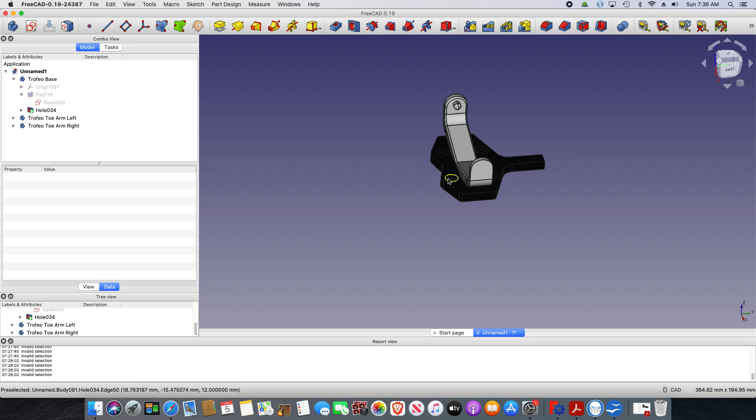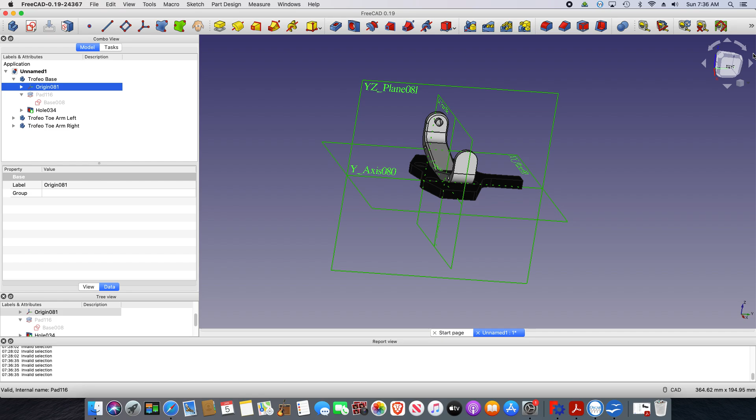To demonstrate FreeCAD, let's say we want to build a 6mm shim for our ATK Trofeo toe. I've already drawn the toe, and I've got it 6mm off the ski, where the axis coordinate system XYZ, we're 6mm off the ski here.

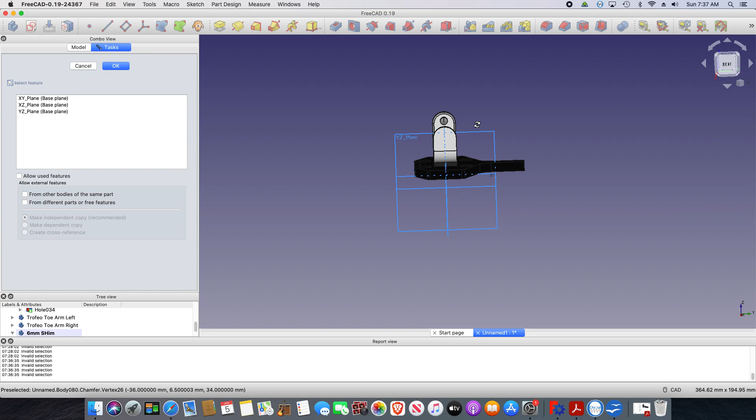So the first thing we're going to do is create a new body over here. We're going to name that body 6mm shim. And then we're going to create a sketch on that body, and we're going to make that sketch on the XY axis, which is X left/right, Y forward/backwards, Z up and down.

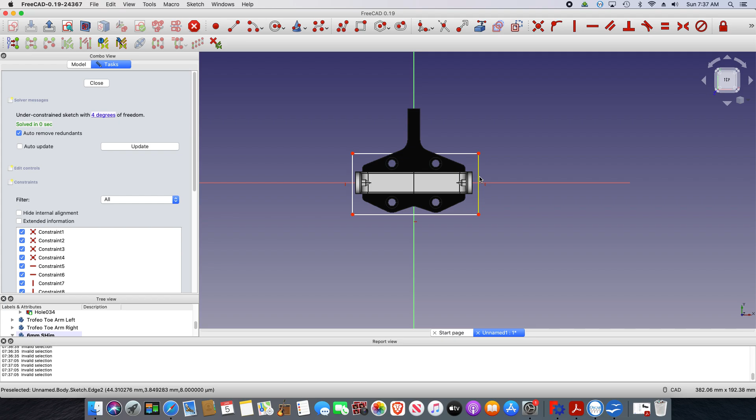So now we have a sketch tool, and we have some options of things we can draw. One of the things we could draw would be a square, so I'm just going to put a square on here. Simple. And then, very important in FreeCAD, is the ability, the necessity, to constrain your sketch.

So the first constraint I'm going to put on here is to make the y-axis dimension symmetrical about the x-axis. So now that's symmetrical. And then the x-axis dimension symmetrical about the y-axis, using the symmetry tool here. So now no matter what I do to the part, it's going to be symmetrical.

So we need some dimensions. Normally I'll just drag things to about where I want them, and then I'll select the two endpoints and use the dimension tool. I usually try and make things round numbers - I work in millimeters. Making things round numbers just makes them easy to remember and keeps things simple.

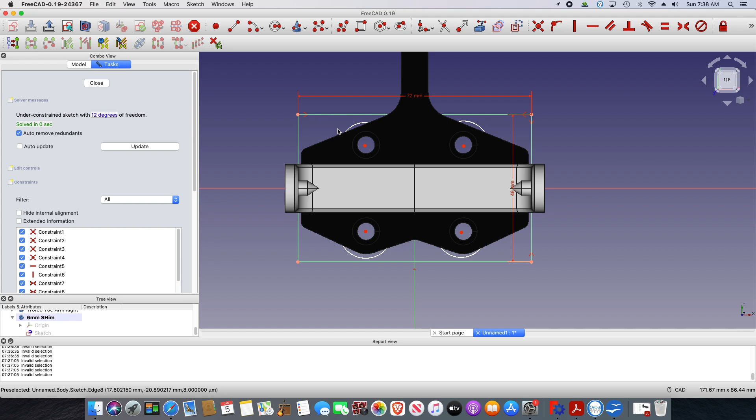We'll just create that. Then the next thing we want to do is have 4 holes in our shim for the fastener bolts to go through. You couldn't see it very well, so I'm going to go ahead and hide the base, and then go back into the sketch so you can see what I'm doing.

So we have 4 holes. We'll dimension those holes with the diameter tool here, and we'll make them a clearance hole for an M5 screw.

Then again, we want these to be symmetrical about the axes in both directions, so we're going to make those constraints happen. As you can see, my constraints are reducing - it'll tell you here when you're not constrained. Now I have a redundant constraint, which tells me which one, so I'm going to just go delete that one. I still have 4 degrees of freedom.

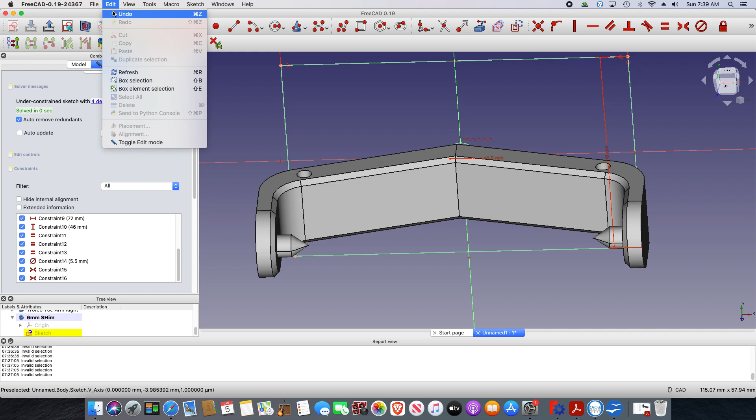That did not work well, so I'm going to undo. There we go, didn't like something I did. So I'm actually going to make this one in line with the other one. I think now we're good, and I'm going to make these two in line with each other.

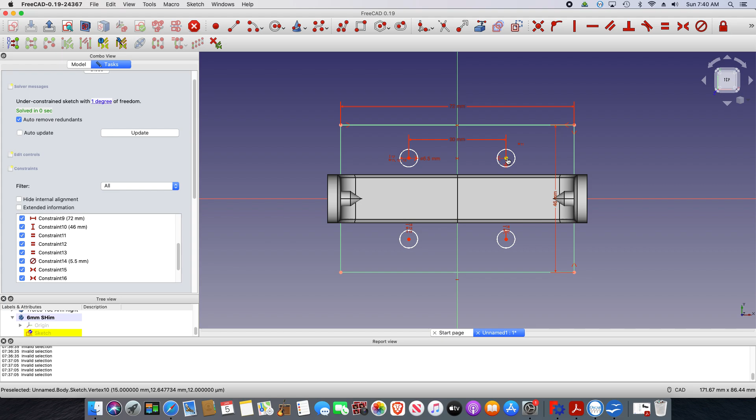So then the hole spacing for the standard tech toe is 30 wide by 27 tall. Now we're fully constrained, everything's green, good to go. So the sketch is done, I'll put the base back on there. We can see the holes are in the right place.

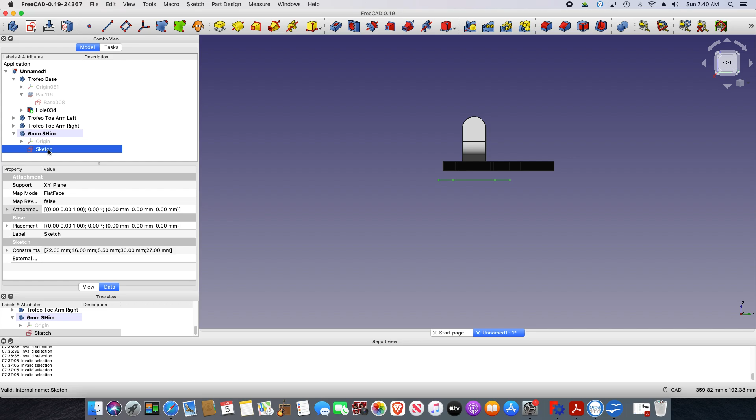So the next thing we're going to do is pad the sketch. I'm going to select the sketch and hit the pad tool. This grows it into the axis that the sketch is not on, and I'm going to choose, say, 6mm. And now we have it - if I hide everything else, see, we have our shim.

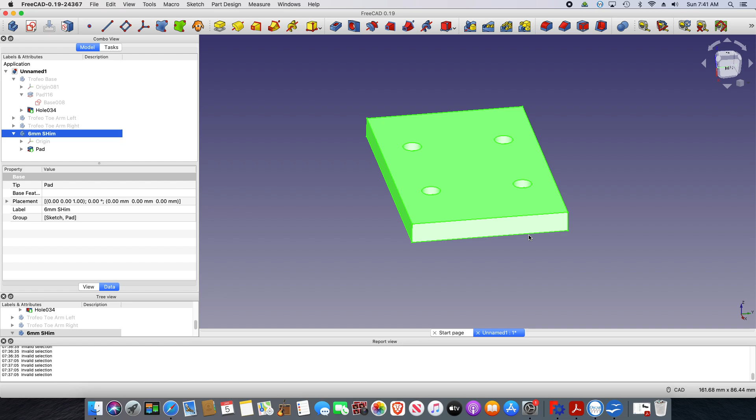And the last thing I will do is export the shim as an STL file. Save it, and then that's the file you can send to your 3D printer - make sure to request 100% infill. Of course, I haven't cleaned this up and made it pretty. You can do kind of cool stuff like add fillets. It gets prettier, but you get the basic idea.